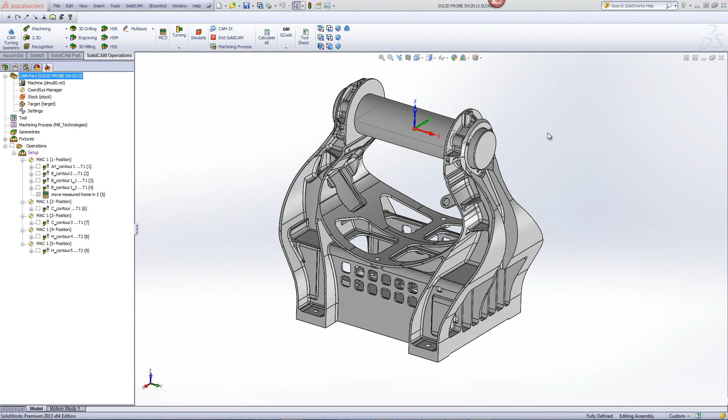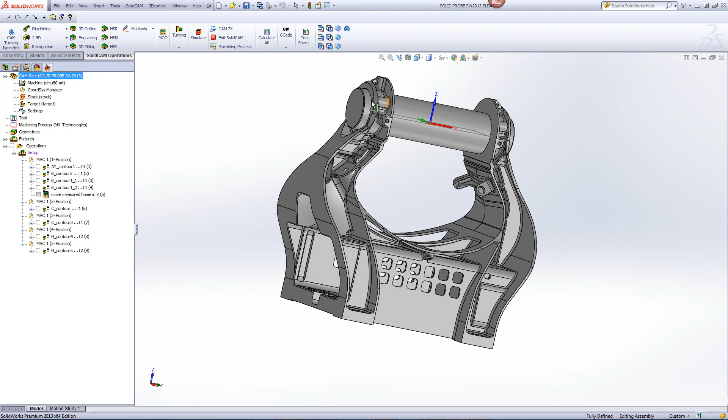In this recording, we'll demonstrate the use of probe on multi-positions on this machine part. I'm going to be using the probe to check the straightness of this surface, the height of this surface, the diameter of this boss as well as the diameter of this other boss, plus the diameter of this hole over here, as well as the diameter of this hole over here. This will be done in multi-positions.

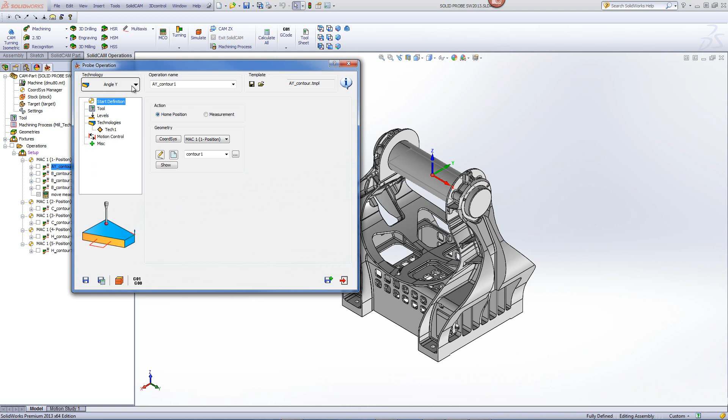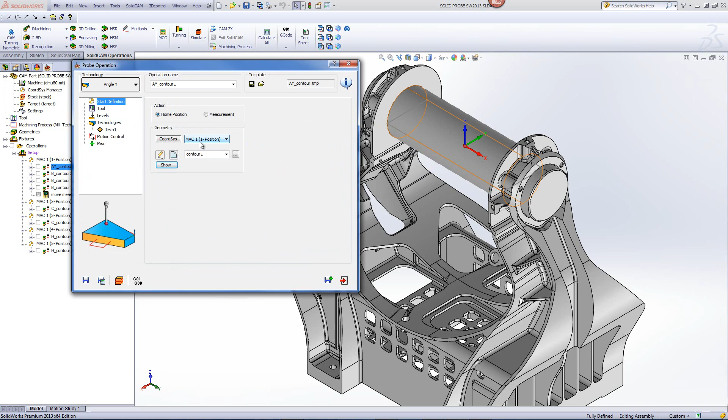If we start with our first operation in probe, we've used the option of angle Y. If we take a look at our geometry, you'll see we'll be working along this line, checking along this line. We have our probe tool, and in our Tech 1 area we have the levels we'll be working on, level 0. Also note that we'll be working in MAC 1, position 1. If we take a look at our simulation, you'll see the probe will go down and check on these 2 points to check for the straightness of that surface. Next, I'd like to check the width of this cylinder over here.

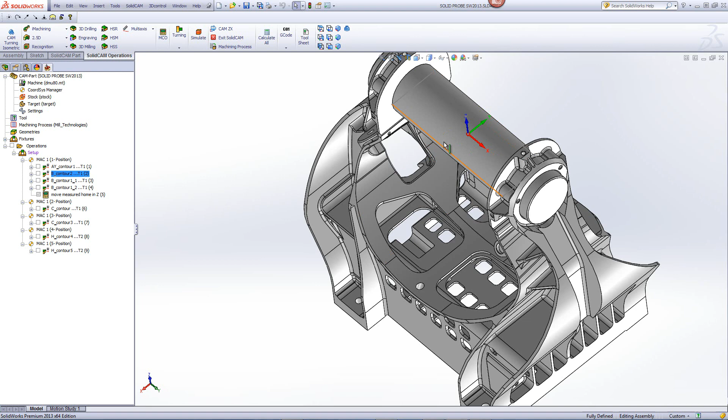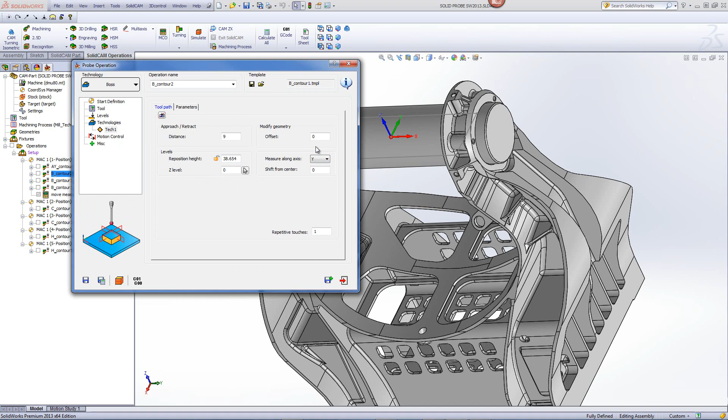For that, I've used the probe operation of boss. The geometry in this case will be this area as shown, and we have our probe tool. If I go into Tech 1, you'll note I'll be checking only in the Y direction, as opposed to X or X and Y. The level again will be 0, as that's where the cylinder is at its widest. Taking a look at our simulation, you'll see our probe tool goes down, measures one side, and just like in a boss operation, goes up over the top and back down, checking the other side.

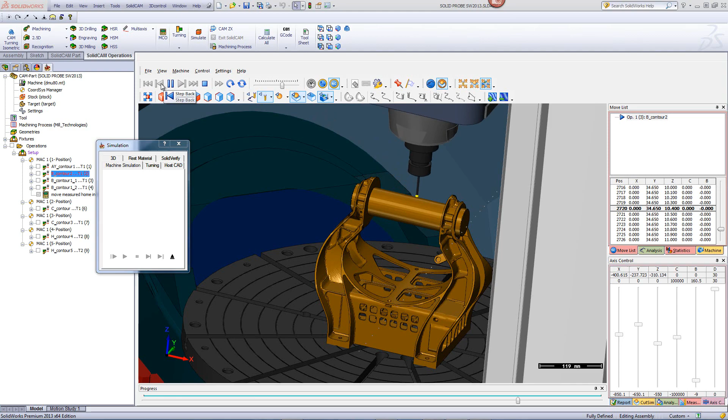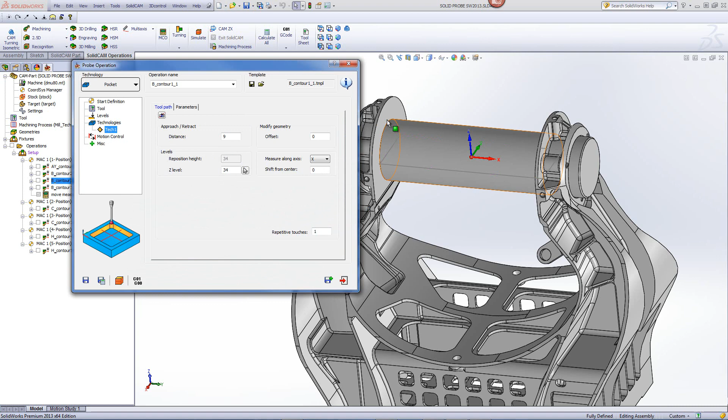Next, I'd like to check the distance between these two surfaces. For that, I've used the option of probe pocket. My geometry is the same as in the previous operation. But this time, when I go into Tech 1, you'll note I'll be checking only in the X direction, going from this surface to this surface. Taking a quick look at my simulation, you'll see the tool will go down and check this surface, as well as this surface, to check the distance between those two surfaces.

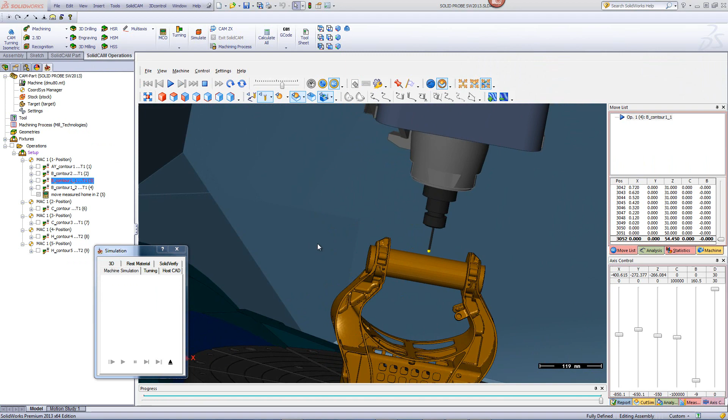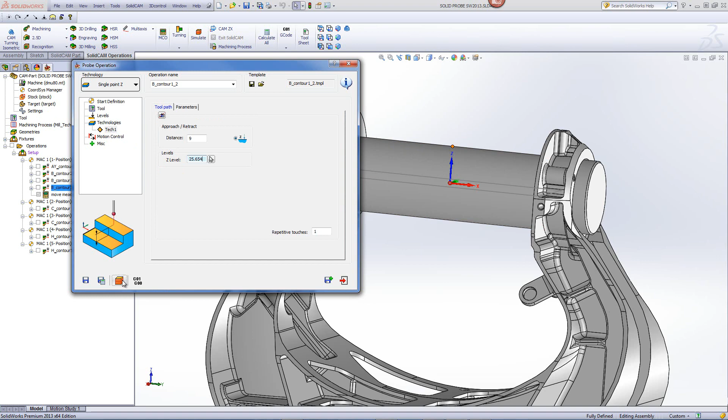Next, I'd like to check the height of this cylinder. So I've used the probe operation of single point Z, where my geometry is this point at the very top of the cylinder. If I go into Tech 1, you'll see I have my Z level set at the very top on this point. Taking a quick look at the simulation, you'll see the tool will go down and touch the top of that cylinder to measure its height.

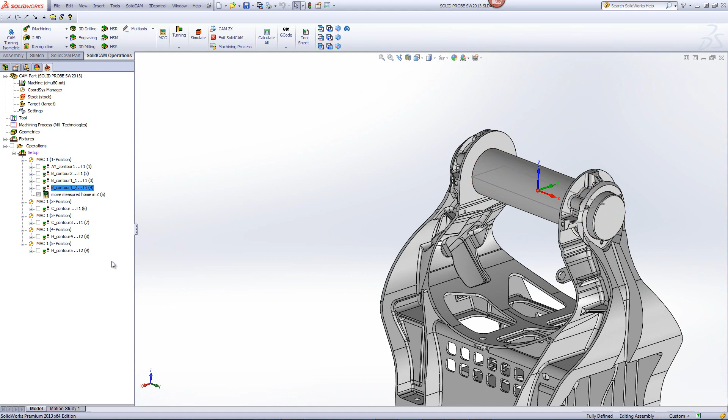Now I'd like to check the diameter of the cylinder on this end, as well as the diameter of the cylinder on this end over here. For that, we'll be using different positions in MAC 1. If we take a look at the first operation, used in MAC 1 position 2, you'll see we have our geometry as this circle. We have our probe, and in Tech 1 you'll see we'll be going down to the level shown in the preview, touching off on 4 different points.

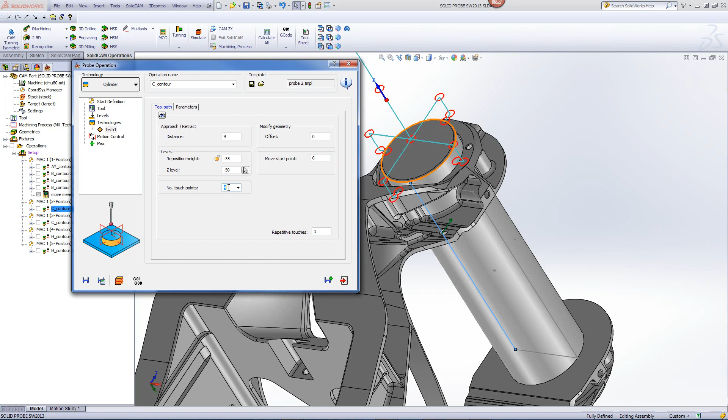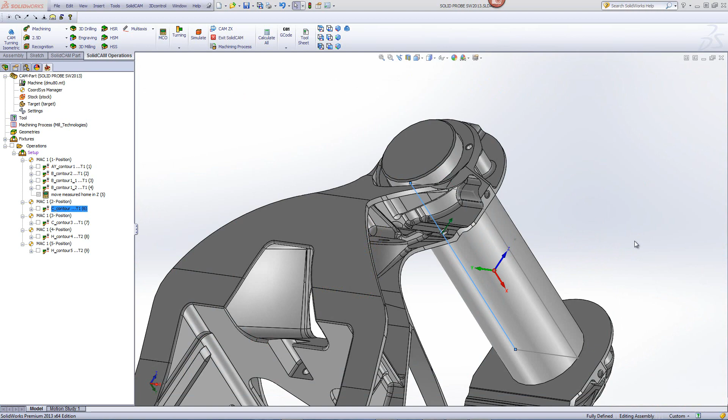Taking a quick look at the simulation, you can see the table has now turned, and it is touching off on all 4 sides, going above the cylinder every single time, touching on all four sides of the cylinder. The same was done for the cylinder on the other side, except using MAC 1 position 3, the exact same operation as before.

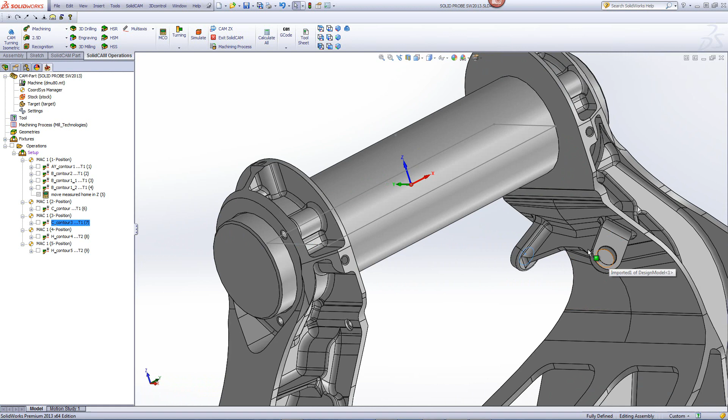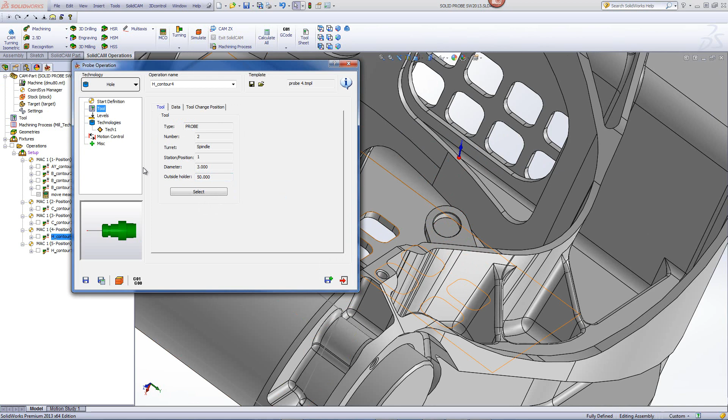Next, we'd like to check the diameter of this hole, as well as this one over here. If we go into the operation, we'll be using a different MAC position that will grab this hole. If we take a look at the geometry, you can see we have this circle as our geometry. We were using another probe with a smaller diameter for that area. If I go into Tech 1, you'll see we'll be touching off inside that hole on 4 different points.

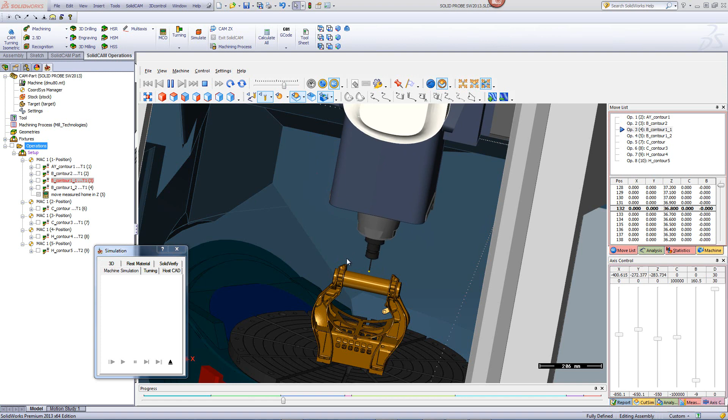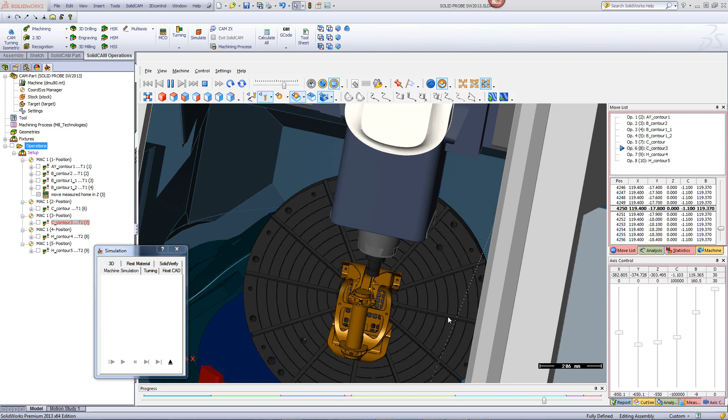Taking a look at our simulation, you'll see the part sitting on a table being measured first in this position, the angle on that side. Then after that, being checked for the width of the cylinder. After that, checking the top distance between these two areas and the top of the cylinder. Now the part was turned to check the cylinder diameter on that side, as well as flipped to the other side to check the diameter there. Next, it's flipped over to check the holes on that side, and this hole as well.